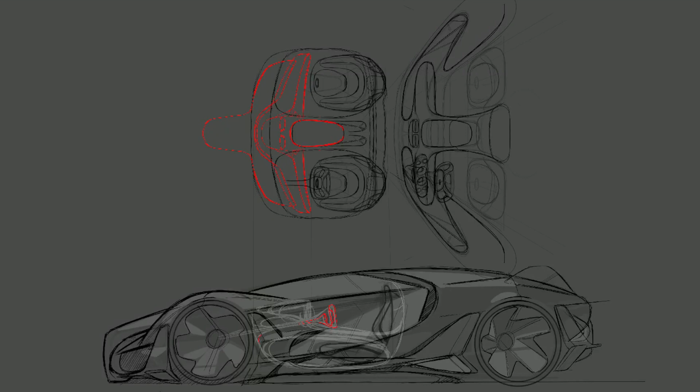All right, let's go ahead and get started right now. I've decided to record from my desktop so that I can freeze whenever I want. So yeah, let's get started. Right now what I want to show you guys is how I would start a project out, if it's a brand new project I've never done before.

And the best thing to do is to find a picture - let's see if we can pause it just in time. So what I did here, I found a picture of a Bugatti Veyron, and I wanted to redesign the Bugatti Veyron.

I am not happy with the Bugatti Chiron. I saw it in person when it first came out at Pebble Beach, and it was just way too flat. If you look at this Bugatti Veyron, it's just perfect - it has a lot of volume on it. You can see how much form is being shown here and back here, and the back is also really beautiful. I wanted to try to capture that - what I think Bugatti is, and I think Bugatti is this. The Veyron is Bugatti, and I also understand that to do a Veyron is very expensive.

So yeah, let's get started. First, again, I found a picture of the Veyron, and from there what we're gonna do is exaggerate the wheel size - this is a video that I got from Procreate. The wheels are gonna increase by a little bit. So you can see here the wheels are increased, just to give it much more of a presence.

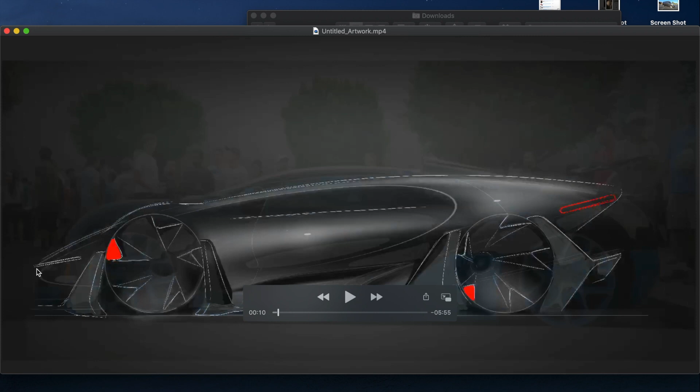So yeah, you can see an old sketch that I did here. I wasn't happy with it, and this is a purely inspirational sketch - kind of what I called it, like just doing something out of the blue, something crazy. I didn't like it, so that's why you see me overlaying my own design with the current Veyron. You can see I'm trying to make everything fit, trying to make the theme I already came up with kind of fit. It didn't work very well, so I just threw away the sketch and came up with a brand new one.

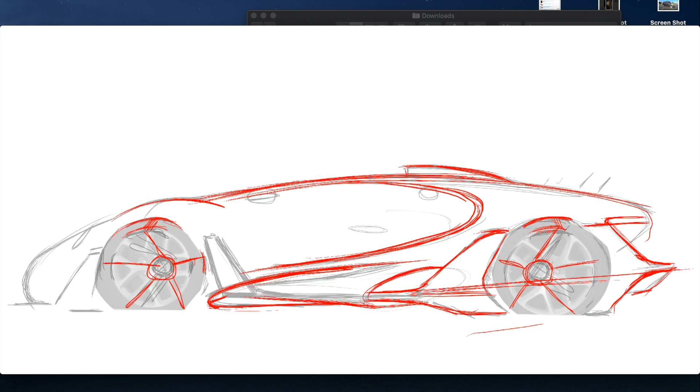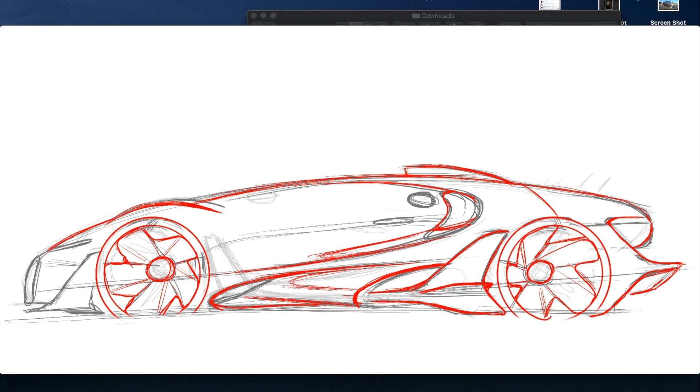I'm really obsessed with the Bugatti airplane that Bugatti designed. It was never actually made, but recently someone built it and flew it successfully-ish, though it kind of crashed unfortunately. It's a beautiful airplane, I want to say it's called the 100P, and it's awesome, just the most amazing thing.

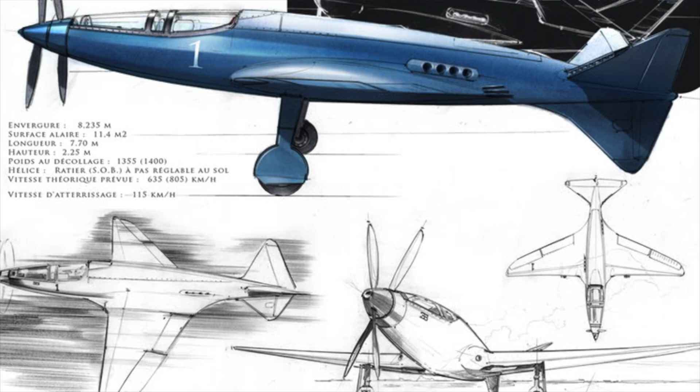So I've taken that inspiration and tried to add wings and stuff like that to my design. Here I'm using the 0, 50, 100 technique: 0 being white, 50 being gray, and 100 being black. Those codes come from Copic markers, so 50 is 50% gray, 0 is the white of the paper, and 100 is the 100 marker.

This technique here is pretty cool. I like it, it's really quick and fast, and you can come up with a design really quickly. It allows you to play with form just on a whim.

But you have to understand what the form is doing. You have to build your form knowledge in your head as much as possible. Look at lots of different inspirations - you can be inspired by anything.

So for my Bugatti, it's inspired by that airplane again - I'll put a picture of it up right here. As you can see, it's very organic and very volumetric.

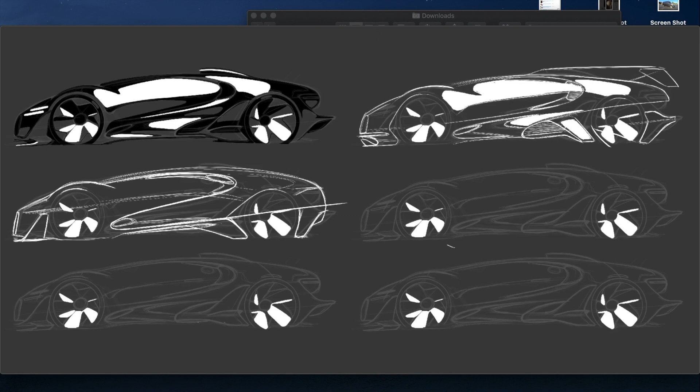I'm trying to play with different themes, and Bugatti has this two-tone theme within the arch, or within the oval I guess you'd call it. As you can see, I switch back and forth between line drawing and the 0, 50, 100 technique a lot.

So the idea here is the gray is reflecting light off the ground, that's why this arrow is there. The body is black, which takes color reflections away from the surrounding area, and then the highlight, which is white, represents the light. That's the basis of this technique.

It's a very difficult technique to grasp. It took me a very long time to learn how to do this correctly. I knew of it for a long time, but I didn't fully grasp it for a very, very long time.

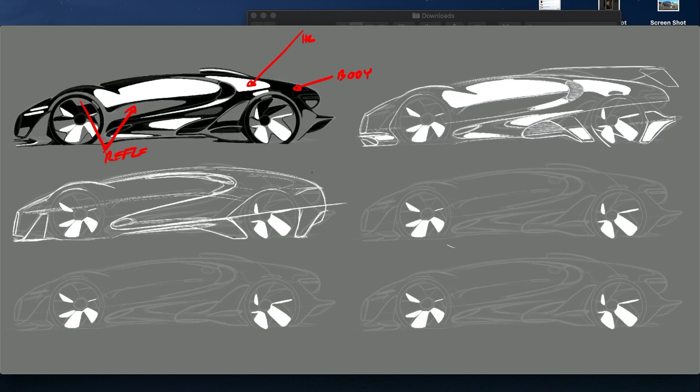You can see that I just copied the wheels across - I made the wheels one time and copied them from one sketch to the next. In this design I'm not focused on the wheel design, so I just came up with a generic wheel that looked good.

Sometimes I even use wheel designs that other people have made. It makes it much easier, because first you want to focus on the general design of the car, and then go design the details like the wheels, the trim, the grill, and the lights.

So again, I'm really focused on form generation and making the form really beautiful and nice, and how that relates between the form and the lines and the wheels.

I really like working in side view first. Before I knew how to design cars, I was always quickly jumping into three-quarter view. I realized that if you can nail down the side view, you can get, I want to say, 80 to 90% of the design down.

Then from the side view, you go on to the plan views, the front view, and the rear view. But I think the side view is the most important view for cars - maybe not so much for supercars. So this is a supercar.

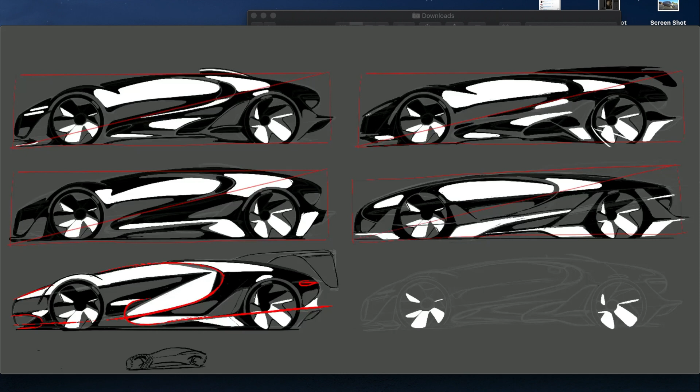So that's that for the side view. So here I take the plan view and the side view into a new document, and now I'm going to line up the wheels, both the front and the rear wheels, and then the overall length of the vehicle. And then I'll even line up the theme eventually.

But I still like to try to leave it kind of loose, because right here you're still kind of exploring and trying to find shapes and designs. Even looking at the sketch right now, I can already think of a new design that I want to do.

So what I'm doing here is setting up the document to where I can do a plan view. You can see at the beginning I've already set a layer in Procreate to symmetry, and I set the symmetry right here in the middle, and it goes all the way across. So when you sketch one side, it also sketches on the other side.

And I love sketching in this kind of symmetry because it feels so good, because it almost feels like you're doing minimal work, and then you're getting really cool results.

Again, you want to try to explore, and that's kind of what I'm doing here. I'm just kind of roughing everything in with the red ink.

You always have to be experimenting, always, always. So I'm just playing with the idea of—I think with this first sketch, I was doing a typical design of an organic Bugatti, and I decided

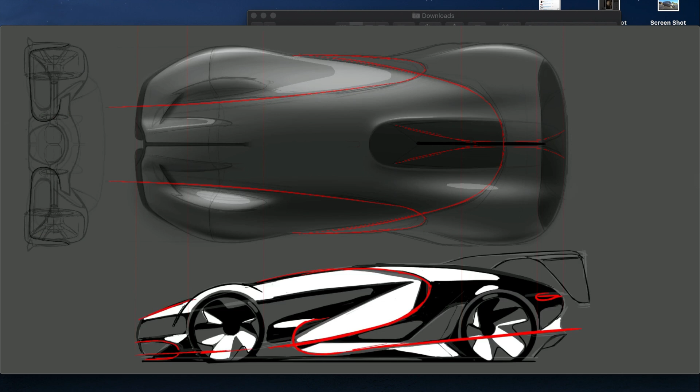So you can see I'm sketching the mechanicals a little bit on this side. You can see the wheels and the rims and stuff like that. I kind of like this idea of this horseshoe with this gap in the middle.

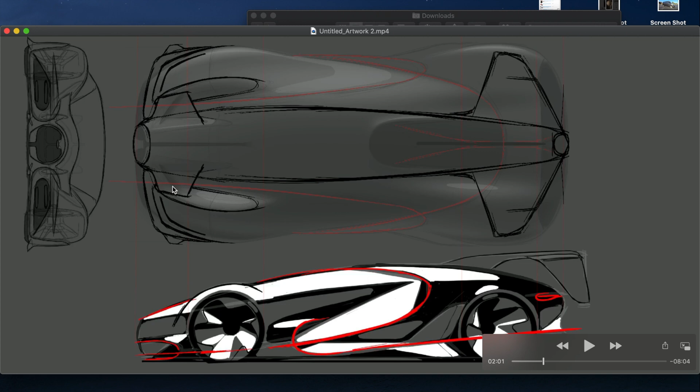It's really nice. Again, design inspired by the airplane. You can see the airplane here taking shape—that's the airplane wing, that's the front. Normally the propeller would be here. So I just love the idea of taking inspiration from an airplane.

So again, I'm still exploring. It's always about exploring, about taking the time to just kind of explore different ideas. You don't ever want to rush. You want to give yourself time.

It's a balance of art and design. Art is like the ultimate expression - artists can sit around and come up with a lot of ideas all they want in art. But design, you have a goal to meet. You have investors trying to make money, or your manager trying to push it to get done. You got to put this into production. So there is a sense of art in it, but it's mostly science, and you have to have that balance because eventually this vehicle has to be made, and you can't sit here and sketch for 20 years. I mean, I wish I could, but eventually you have to finish.

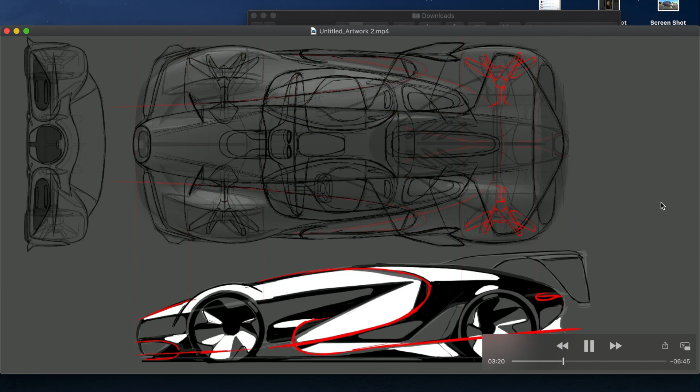So here I'm going into the interior. The video shows that I'm going pretty quick, but I spend quite a lot of time on the interior actually. I'm trying to get the mechanics kind of correct, kind of cool looking at the same time. The interior is the most tedious part because you have to go into so much detail. And even though I'm not done with the interior, I just got to a level where it's kind of cool.

Now I'm going back and doing a shape around the interior, and maybe there has to be a balance - it has to work with the interior, it can't just be a total exaggeration. I've seen that before too in some professional design sketches where you look at it and think wow, this thing looks like a crazy interior, and then when you see the actual pictures, it looks nothing like that.

But at the same time, this is something I've learned while working with Frank Stephenson - you have to come up with a sketch that's just wow, whether it be color that pushes that extra realm of wow factor, the form, the color, the wheel size, or whatever. You have to sell your sketch, your design, to get picked.

And these car projects take quite a long time - like 4 years. So your design has to last for 4 years through the design process and still be fresh when it comes out.

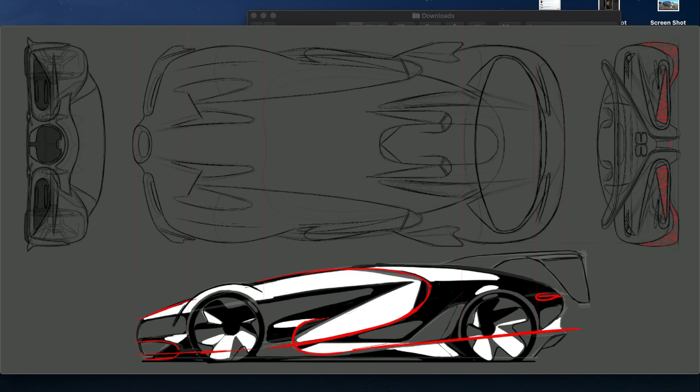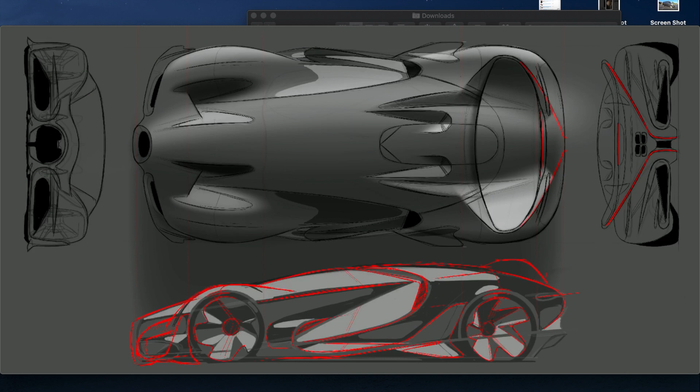You have to keep everybody excited. As a designer, you're kind of like the cheerleader. Of course, different companies have different cheerleaders, whether led by a designer or led by engineering - it's always a balance. You want the crazy technology and the crazy speed or power, and you have to have the design to look good and go fast. As a designer, that's your job - to make it look good. And then the engineer is supposed to be there like, okay, you can do this, you can do that. Or maybe the engineer will come in and say, hey, we found this crazy new material that makes the car lighter, so let's try to use it.

So again, your job is to be the cheerleader, and to cheer the company on, you know.

Now that I've finished a plan view that I like, I went in and did a new side view - just tweaked it a little bit, added more detail in the back and the front, just to see how it looks, kind of adjusting and massaging everything. This document is like a week's worth of work, I didn't sit and do this in one try. It takes a lot of time to get the right look and feel - you're not going to be able to sit down for an hour and do this.

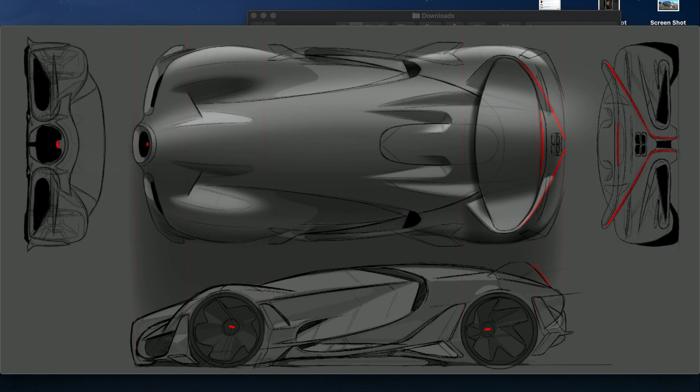That's why designing cars is an actual job. As you can see, now I'm going back into the interior, and I set a document, set a layer to symmetry, resketch a new seat, and just put it in.

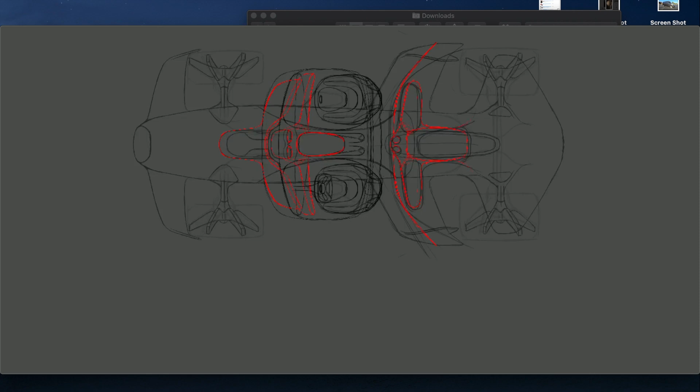So at this point, if I remember correctly, I am moving on to the interior design, and my plan is to come up with a nice, decent plan view of an interior and try to move it into a front facing, tipped up view.

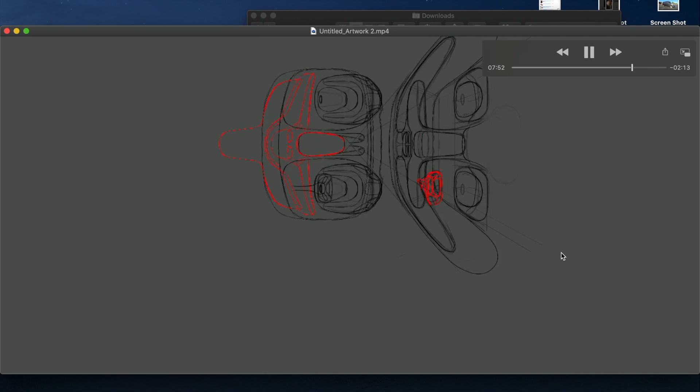You can see a little bit of the center console, you can see the door panels. This is kind of a typical design. I feel like if I were to come up with something crazier, I would even go into VR sketching and just sketch something in VR and come up with some crazy forms, because this is kind of a conservative design—you still got the IP, you got the center console, you got the steering wheel, so it's very simple.

I love this look that a bunch of designers out there do, where you can see the interior and inside, it adds that sense of realism, where people think 'whoa, this guy knows what he's talking about,' even though he really doesn't.

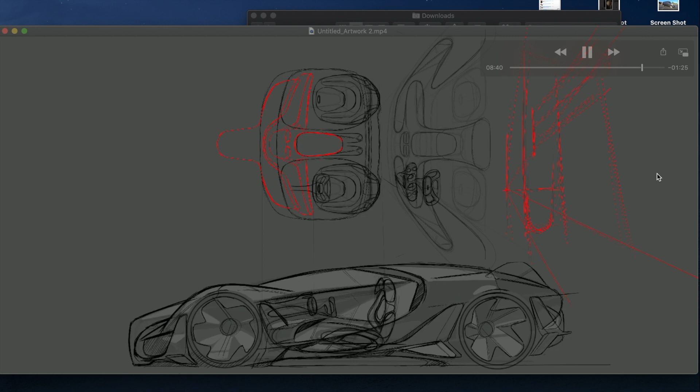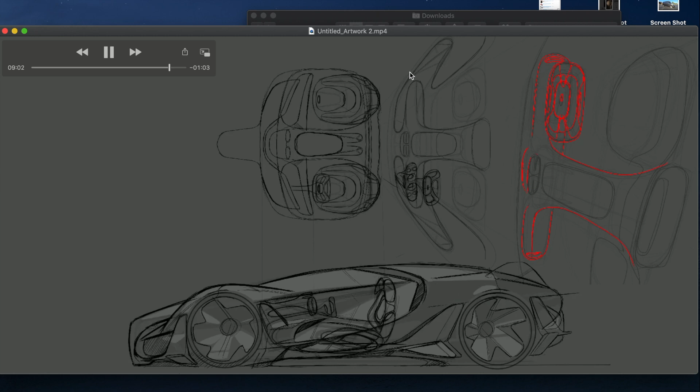Sorry for not tilting the document, but now I'm planning out a 3/4 view of the interior just to see how it is. The idea here is to have this tube that runs from the back of the car to the front—it goes through kind of tilted, and then it has this propeller shape that sticks out from it. Again, the idea of that airplane, that's what I'm trying to do.

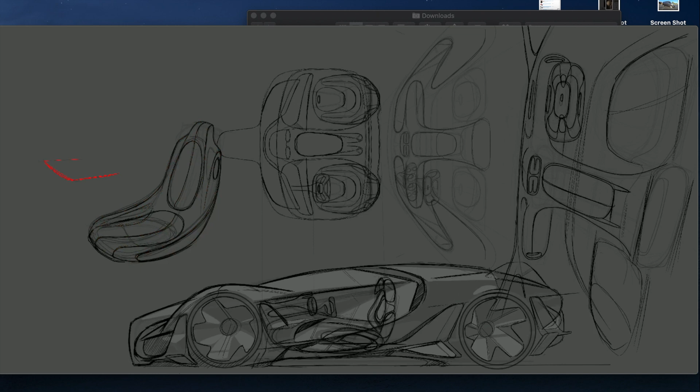To be honest, I kind of lost sight of the general theme of the exterior, which is organic versus inorganic. Once I move forward to do the interior again, I'll revisit it and come up with a better theme. Right now, I even think I'm gonna redo the exterior design.

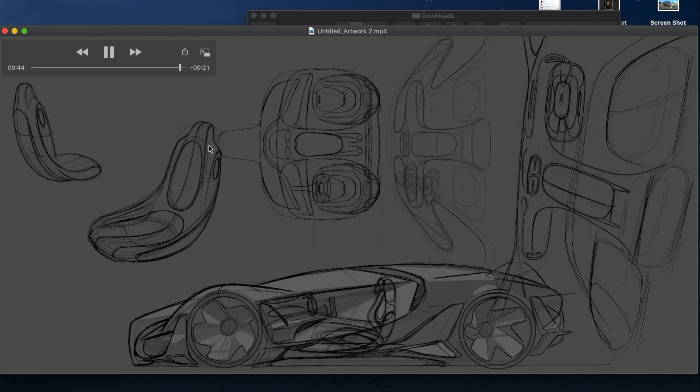So here I'm doing the seat design from different angles, just trying to come up with some different shapes. The idea is that this is like a shell, and this is leather right here, and then back here you can see the carbon structure underneath. It's a really cool design—I'm really excited to render this out.

So there you go. This is gonna be part one of the design series, and in this part it's not much of a deep dive so much as it's just a general overview of what I do.